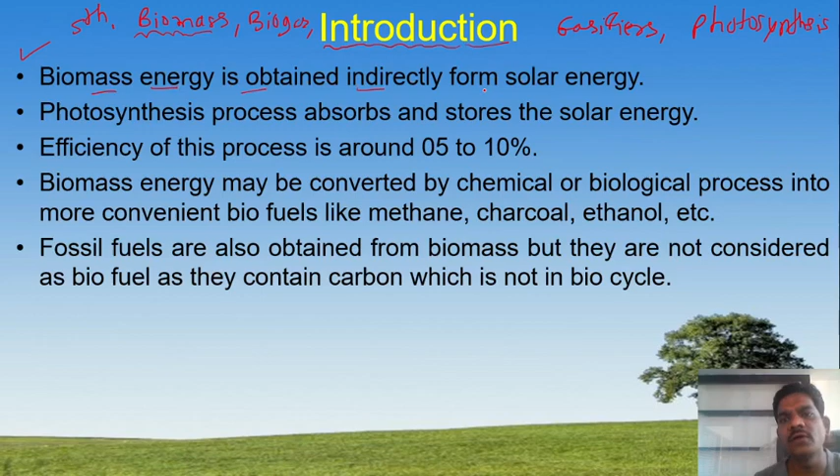You see here, guys. Biomass energy is obtained indirectly from solar energy, right? Means we know that biomass totally depends upon solar energy. We know that this biomass is totally dependent upon the sun energy, solar energy. Yes or no? Yes. Photosynthesis process absorbs and stores the solar energy. We know the efficiency of this process is around 0.5 to 10%.

Biomass energy may be converted by chemical or biological process into more convenient biofuels like methane, charcoal, ethanol, etc. So from the biomass we can obtain methane, charcoal or ethanol, such various types of fuels we can get from the biomass. By which process? By chemical or biological process, guys.

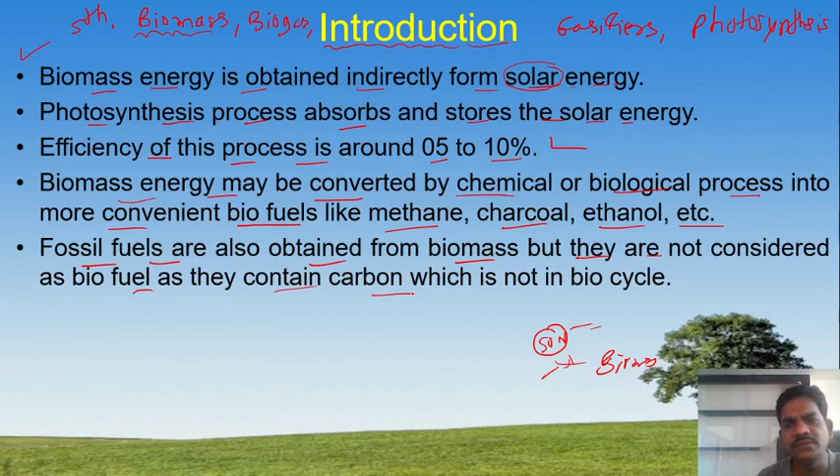Then another point: fossil fuels are also obtained from biomass, but they are not considered as biofuel as they contain carbon which is not in biocycles.

So what are the advantages related to biomass, if you consider? It is a renewable source of energy, meaning it can be used again and again, that is called a renewable energy source. The energy storage is an inbuilt feature of it. We can store energy inside the biomass, a lot of energy is stored there, right? It is an indigenous source requiring little or no foreign exchange. There is no exchange required.

The forestry and agriculture industries that supply the feedstock also provide substantial economic development opportunity in rural areas. You see, in rural areas we can develop this biomass in more quantity, so rural areas develop, agriculture industries also develop.

The pollutant emission from the combustion of biomass is usually lower than that from fossil fuels. Means the pollution emitted by diesel and petrol is more as compared to the pollution emitted by biomass.

Commercial use of biomass may avoid or reduce the problem of waste disposal in other industries, particularly municipal solid waste in urban centers.

Another use: biogas plants, apart from supplying clean gas, also lead to improved sanitation and better hygienic conditions in rural areas, as the harmful decaying biomass gas is stabilized.

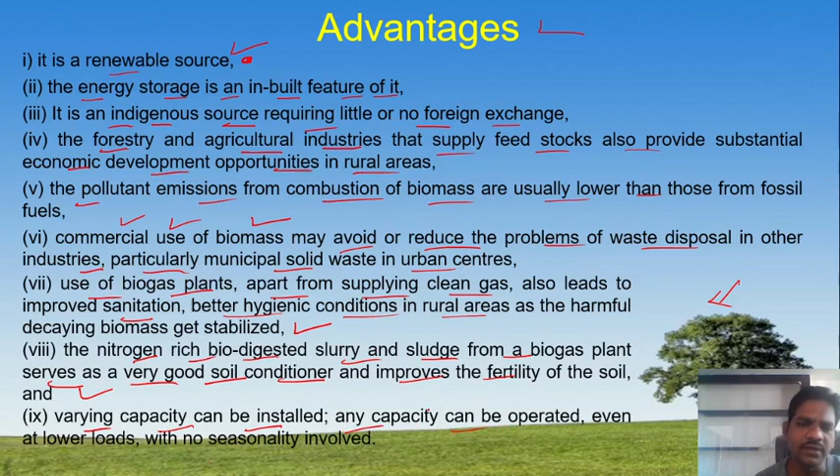Varying capacity can be installed and can be operated even at lower loads with no seasonality involved. And these are the very easy and simple advantages of biomass, guys.

So another point: what are the disadvantages of biomass? It is a dispersed and land-intensive source. So it is in dispersed form, and depends upon land-intensive source, how much land is available.

It often has a low energy density. The density of energy, meaning we know density is mass upon volume. So the density of biomass is very low as compared to petrol and diesel, guys. Yes or no? Yes.

Then the third disadvantage: it is also labor intensive, and the cost of collecting large quantities for commercial application is significant, right? Most cost is required to give the labors.

Most current commercial applications of biomass energy use material that has been collected for other reasons, such as timber and food processing residues and urban waste. These are some uses to collect biomass.

Capacity is determined by availability of biomass and is not suitable for varying loads. Okay, and it is not feasible to set up at all locations. It is not possible to set up at all locations where we can transport the biomass easily.

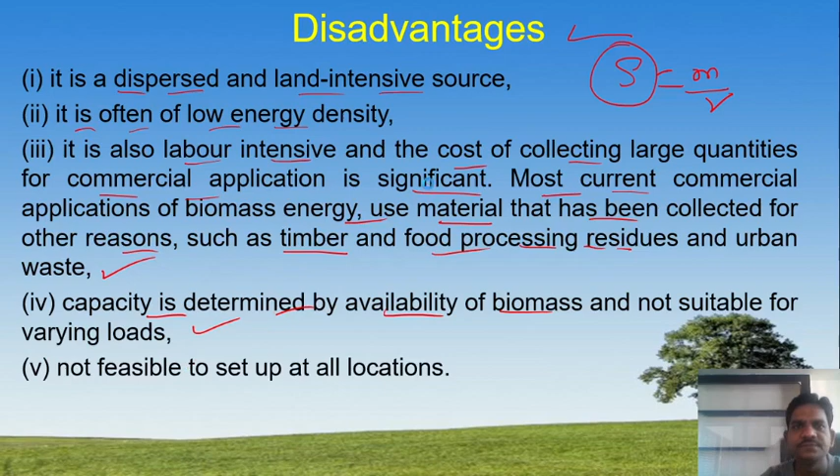So how can you produce the biomass? Energy plantations. Technically speaking, energy plantation means growing select species of trees and shrubs which are harvestable in a comparably shorter time and are specifically meant for fuel. Such plantations can be easily harvested, and the product develops within a shorter period of time. So we develop such tree species to produce biomass.

The fuel wood may be used either directly in wood burning stoves and boilers, or processed into methanol, ethanol, or producer gas. The energy plantation provides an almost inexhaustible renewable source, with total time constant of 3 to 8 years for each cycle. What are the features of energy plantations?

The heat content of the wood is similar to that of Indian coals. This is one feature. Wood is low in sulfur and is not likely to pollute the atmosphere. There is very less pollution produced by the biomass.

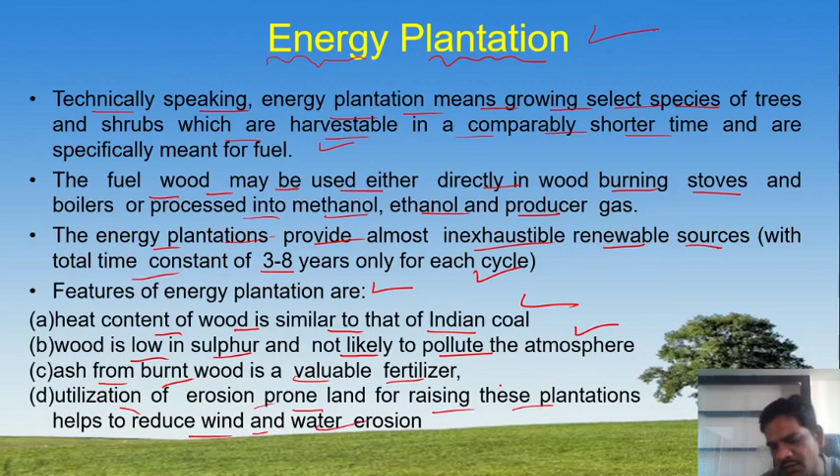Ash from the burnt wood is a valuable fertilizer. After combustion of the biomass, the ash produced is used in farms to improve soil fertility. Utilization of erosion-prone land for raising these plantations helps reduce wind and water erosion. These are some aspects of the energy plantation process.

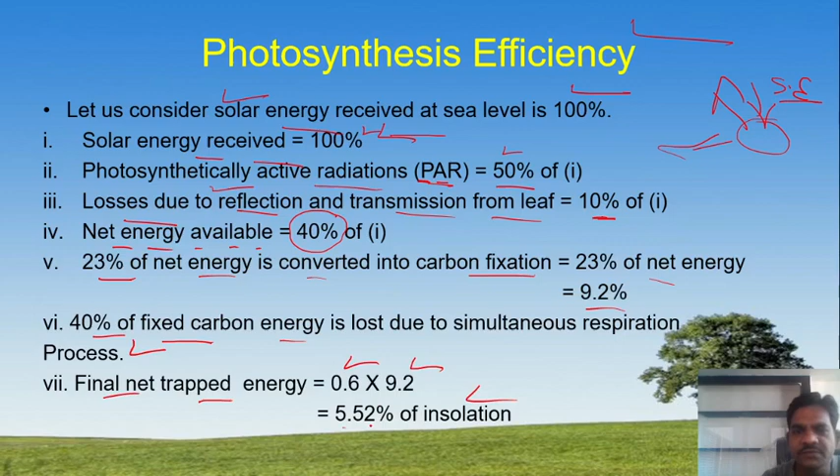Out of 100% solar energy, we have 50%, and of that 50%, 10% is lost, so net is 40% useful. Then 23% of net energy is converted into the carbon fixation process, which amounts to 9.2% energy we can use. 40% of the fixed carbon energy is lost due to simultaneous respiration. So the final net trapped energy is 0.6 into 9.2, which equals 5.52% of insolation — meaning 5.52% of radiation can be used in the photosynthesis process.

Now, another topic is biogas generation — how to use biomass for biogas generation. Biogas means methane gas produced through the process of biogas generation. Biogas contains 55 to 60% methane and 30 to 40% CO2.

When organic matter undergoes fermentation, all the biomass through anaerobic digestion generates gas. This is known as biogas. Anaerobic digestion means in the absence of oxygen - there is no use of oxygen. So when organic matter undergoes fermentation through anaerobic digestion, gas is generated, and this gas is biogas.

This anaerobic digestion consists of three phases: enzymatic hydrolysis, acid formation, and methane formation. In enzymatic hydrolysis, fats, starches, and proteins are broken down into simple compounds. It takes about 1 day at 25 degrees Celsius. This is the process of enzymatic hydrolysis.

Second is acid formation. Facultative and anaerobic organisms, collectively called acid formers, break simple compounds into acids. This also takes about 1 day at 25 degrees Celsius. Much of the CO2 is released in this stage.

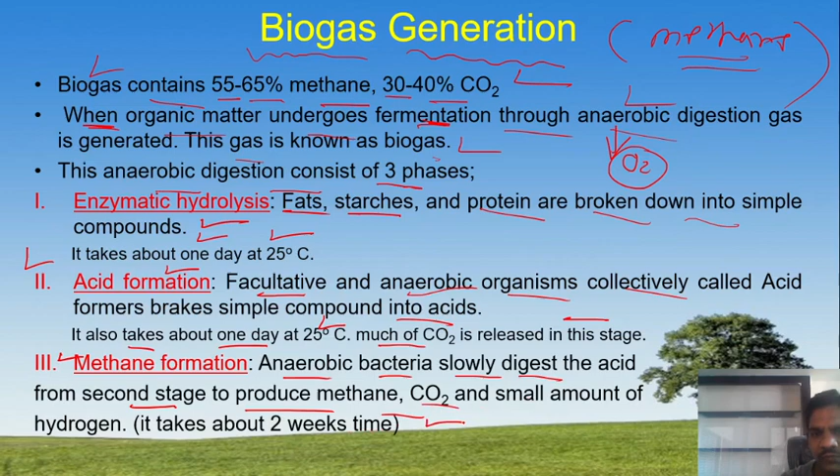Third is methane formation. Anaerobic bacteria slowly digest the acid from the second stage to produce methane, CO2, and a small amount of hydrogen. This takes about 2 weeks. This is the process of biogas generation as methane gas, and this is very important - this question is always asked in exams.

What are the operational parameters for a biogas plant's formation? First we require temperature. Temperature plays a very predominant role in producing biogas. Methane-forming bacteria work best in the range of 20 to 55 degrees Celsius temperature in a digester tank - whatever tank we have, we must maintain this temperature range. The rate of digestion increases with temperature. Gas yield rate doubles at about every 5 degree Celsius increase in temperature. But with increasing temperature, methane content reduces.

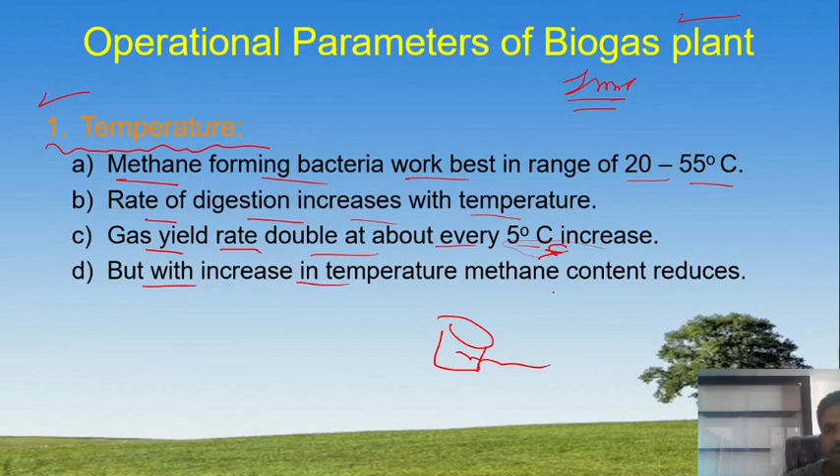Pressure - how much pressure is required for biogas formation? This is a very important parameter. Minimum pressure required is 1.2 bar, considered an identical, ideal situation. Any leakage of oxygen in negative pressure completely inhibits the growth of anaerobic bacteria.

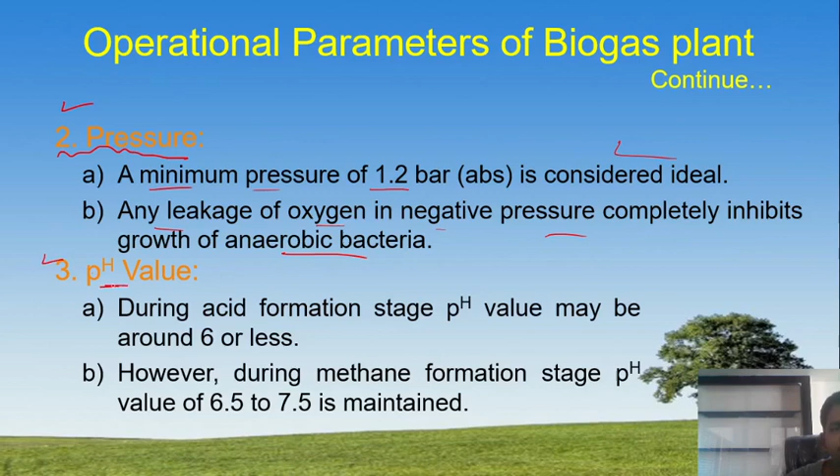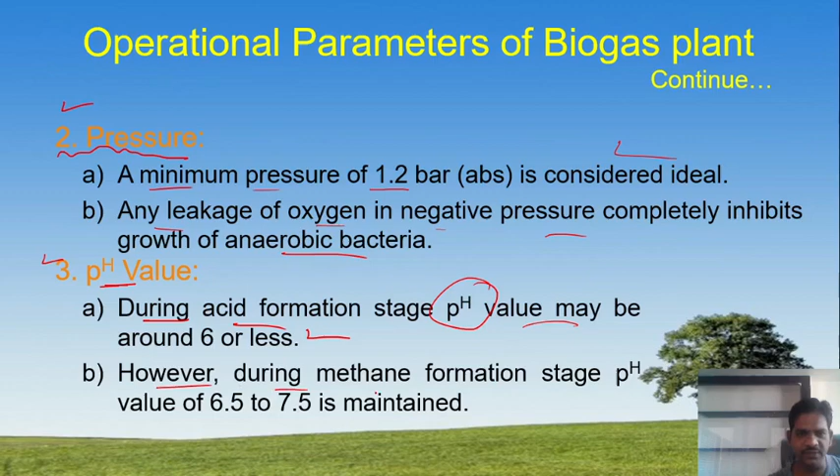Another requirement is pH. How much pH is required during the acid formation stage? pH value may be around 6 or less - this produces a larger amount of anaerobic bacteria and a larger amount of methane gas. However, during the methane formation stage, pH value of 6.5 to 7.5 is maintained.

Then the solid to moisture ratio - how much is required? If water content is too high, the temperature of the slurry decreases the gas formation rate. This is very important. If water content is too low, acid accumulates and hinders fermentation. The optimum total solid concentration ratio is 7 to 9%.

Feeding rate - how much biomass is fed into the digester tank? If feeding rate is too high, acid may accumulate and the digestion process may stop. Also, at a higher feeding rate, the retention period will be very less.

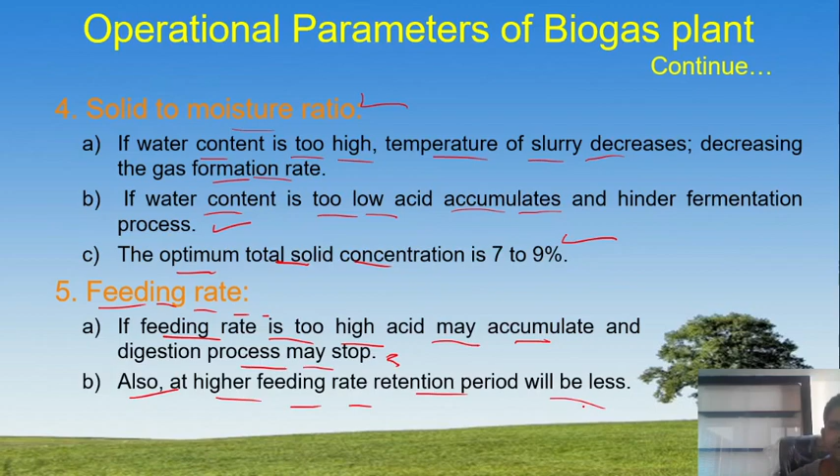Another important parameter is carbon to nitrogen ratio. This is a very important ratio for producing biogas in the digester tank. Carbon and nitrogen are the main nutrients for anaerobic bacteria - carbon supplies energy, and nitrogen is needed for building up cell structure. The optimum carbon to nitrogen ratio is 30:1, meaning carbon required is 30 and nitrogen required is very less, as bacteria consume carbon 25 to 30 times faster than nitrogen.

Then seeding of bacteria - to start and accelerate the fermentation process, a small amount of digested slurry containing methane-forming bacteria is added. This is known as seeding - we add methane bacteria to the digester tank to improve the methane gas fermentation process. If the biomass is animal manure, it already contains acid and methane formers, hence seeding is not required. But if biomass is from other sources like jungle waste, then seeding process is required.

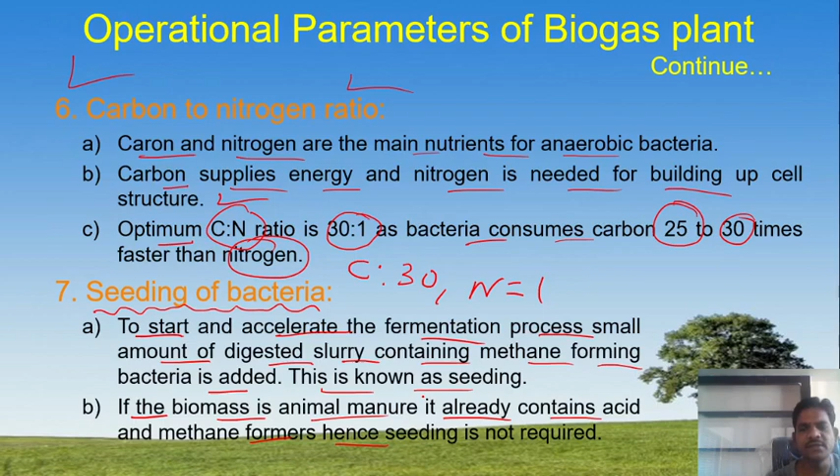Mixing or stirring maintains uniform concentration and temperature. Mixing minimizes the formation of scum at the surface, and frequent stirring prevents the deposition of solids at the bottom. So we require frequent mixing and continuous stirring inside the digester tank.

Retention time is determined by the volume of the digester divided by the volume of slurry added per day. It is optimized to achieve 70 to 80% complete digestion. For cow dung, retention time is around 50 days.

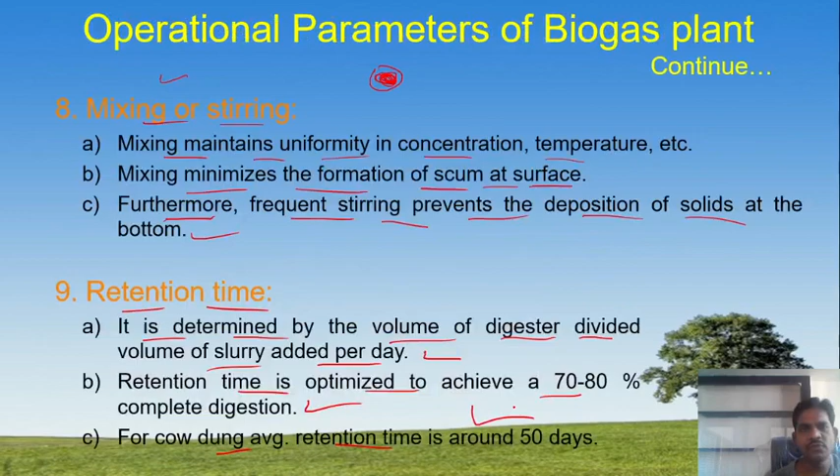What are the classifications of biogas plants? Biogas plants are classified into two types: as per process and as per construction. As per process: continuous type and batch type. As per construction: dome type and drum type. In continuous type, there is single stage and double stage. In dome type, there is floating drum and fixed drum. This is the simple classification of biogas plants.

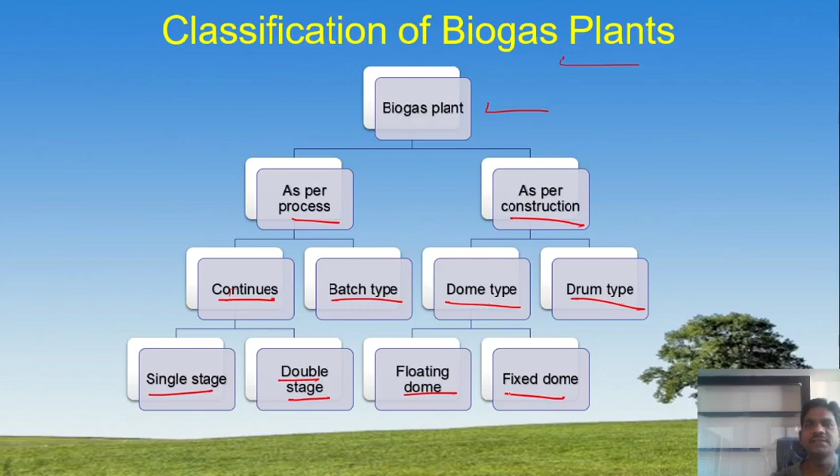In our syllabus, this biogas plant is available. So what is a floating dome plant? This is the KVIC, Khadi Village biogas model. Let's see the working of the floating type biogas plant. It is called floating because the drum floats inside the wall of the biogas plant, hence the name floating dome. Now what is the construction?

This is the mixing tank. Inside the mixing tank, we add the slurry of cattle dung and water. This is our inlet for the digester tank, and this is the inlet pipe. This is our ground level. At the ground level we construct this inlet tank, and below the ground level we construct the digester tank. This inlet pipe from the mixing tank enters here.

The dung and water mixture goes inside this digester tank. This underground digester tank is made of brick masonry. Through the inlet pipe, the slurry of cattle dung is entered inside the digester tank. These bricks provide support for the inlet and outlet pipes. Inside the digester tank, the dung and water mixture is completely mixed here.

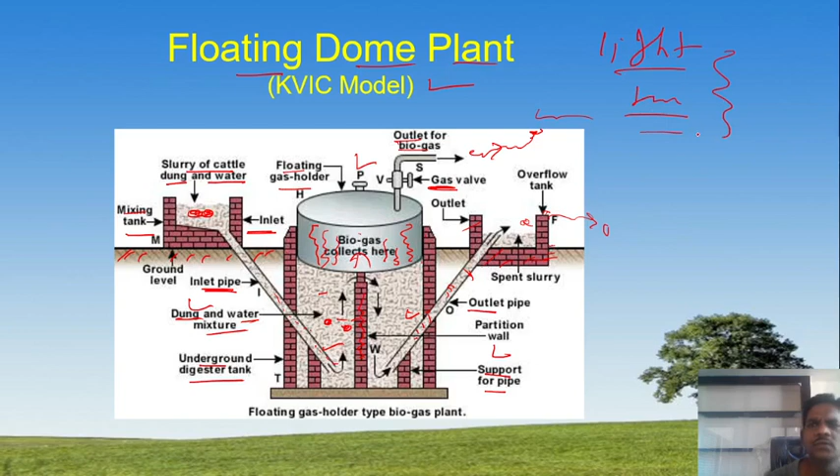Whenever the mixture is put inside, fermentation takes place and gas is generated. This gas is collected inside the dome, and the dome floats from one position to another because of the pressure of the gas. Whenever we open the outlet of the biogas, we can utilize this gas for various applications such as lighting, heating, cooling, or cooking.

After this fermentation process, the slurry comes out from the outlet pipe and transfers into this outlet or overflow tank. This slurry can be used on farms to improve the fertility of the soil and increase agricultural production. So this is the working of the floating dome plant.

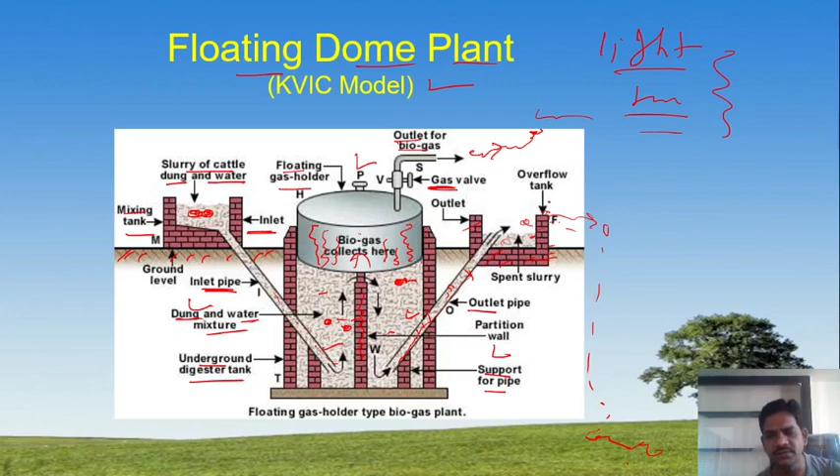Now another type is the fixed dome plant. Fixed dome means the dome of the biogas plant is not movable, it is fixed. That's why it is called the fixed dome plant.

This is the mixing tank. Inside it, we add cow dung, biomass, and water. After properly mixing, this is transferred to the inlet chamber through the inlet pipe inside the digester tank. There is no partition wall here. After the fermentation process, the biogas is produced and directly transferred through this valve.

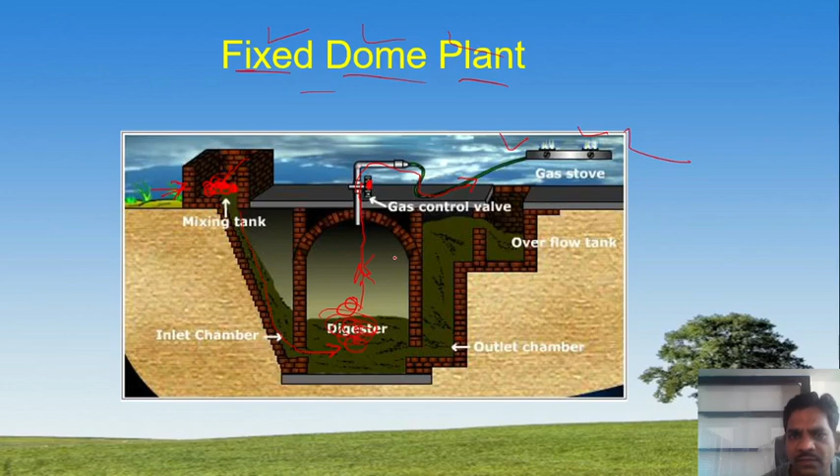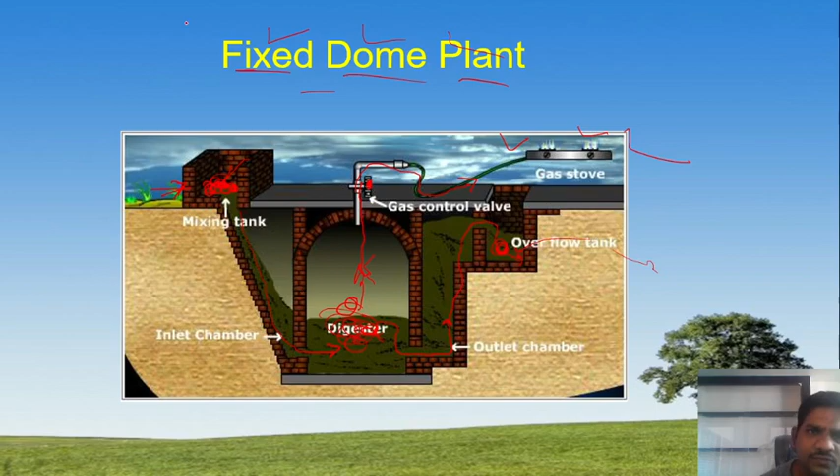Okay, just open the gas control valve, and this biogas, methane gas, we can use for cooking purposes. Fixed dome means there is no movable part. After the fermentation process, the slurry is released through this outlet and stored inside this overflow tank. From this overflow tank, this slurry can be used in farms to improve the fertility of the soil. So this is the construction of the fixed dome plant, guys.

Okay, so when we discuss the fixed dome and floating dome, there is some difference asked in exams. You should know this difference, how to differentiate all these parameters. So if you differentiate the fixed dome and floating drum, in fixed dome the masonry of the concrete structure is entirely fixed.

In floating drum, the masonry is a digester with a steel, plastic, or composite base gas holder being used. The fixed dome is low cost. The floating drum is very high cost, 20 to 30% higher. The fixed dome is low maintenance, while the floating drum requires frequent maintenance. The fixed dome has very low reliability, while the floating drum has high reliability.

Higher masonry and supervision skill is required in fixed dome. In floating drum, low masonry and fabricating skill is required. In fixed dome there is variable gas pressure, which complicates appliance design. In floating drum there is constant gas pressure, which is a simple design to apply and use. So these are some differences between fixed dome and floating drum biogas plants.

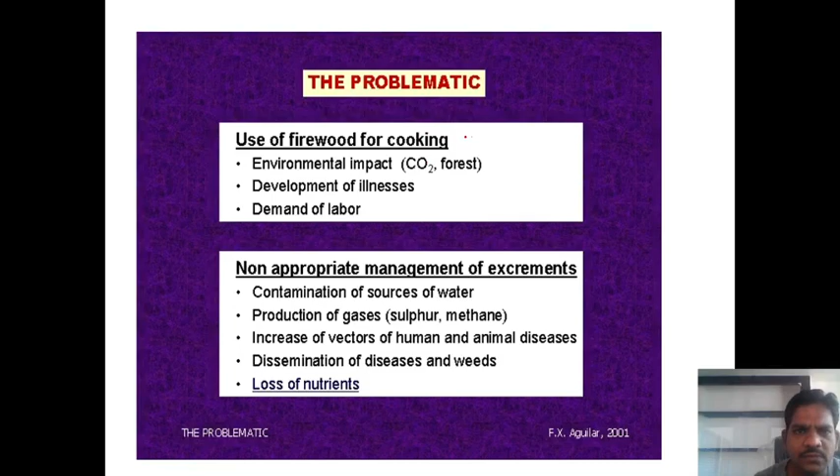So then, use of firewood for cooking. If you consider the production, biogas digestion production, we already discussed these conditions, but in short we will review. We require daily fresh feedstock, meaning we require daily cow dung like that.

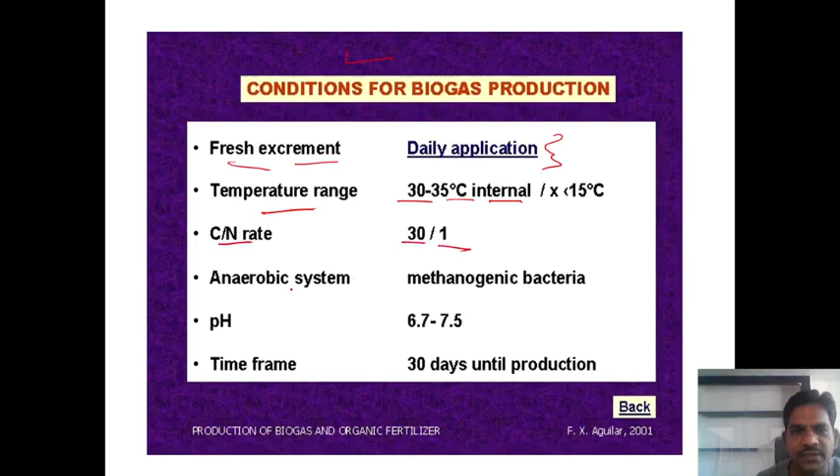The temperature range required is 30 to 35 degrees Celsius. The carbon nitrogen ratio is 30:1. The anaerobic system used is methanogenic bacteria. The pH required is 6.7 to 7.5. The time frame required for full production of biogas is 30 days.

Okay guys, then what is the application of this biogas? Lighting, energy, cooking, and heating application. These are the applications of biogas.

Then, the chemical composition of the biogas: methane CH4 is 40 to 70%. Carbon dioxide CO2 is 30 to 60%. Hydrogen is around 1%. Nitrogen is 0.5%. Carbon monoxide is 0.1%. Oxygen is 0.1% and hydrogen sulfide is 0.1%. This is the chemical composition of biogas.

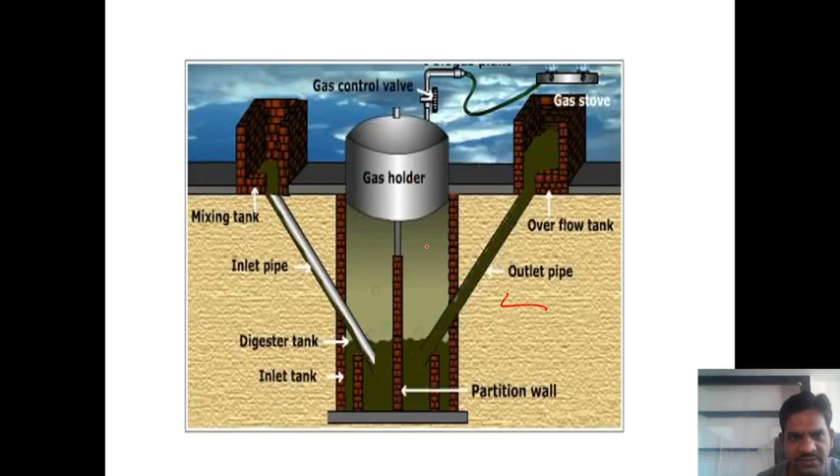So we already discussed this in our previous diagram. This is the floating drum - once again I will revise it, the drum floats inside here, yes or no? This is the fixed dome - this diagram we already discussed. Once again I will repeat this here, look at this diagram.

Slurry of cattle dung is entered inside this mixing tank, guys. This is our ground level. This is the slab cover. This is our digester tank. From the ground level, the slurry enters inside this digester tank. Dung and water are mixed here. This is our inlet chamber, guys. The underground digester tank is here.

Then after this, the slurry undergoes fermentation here, and biogas will be produced. This is the dome, and the dome is fixed - that's why it is called the fixed dome type plant. This gas will be generated, and this gas valve is opened so we can use it for various application purposes.

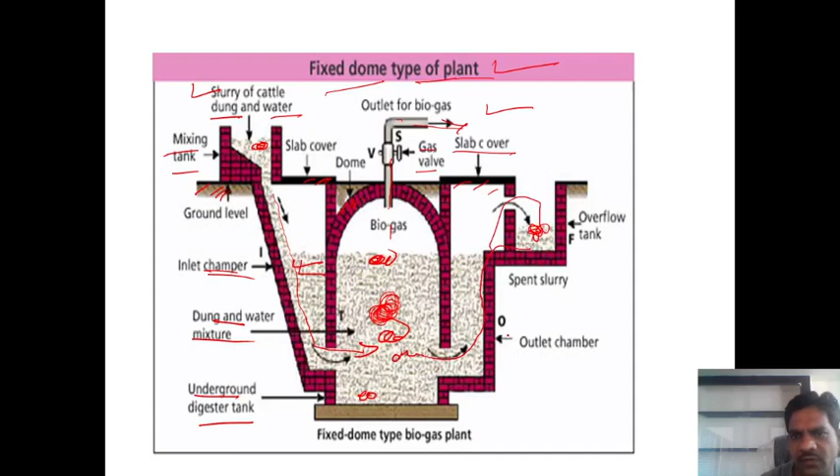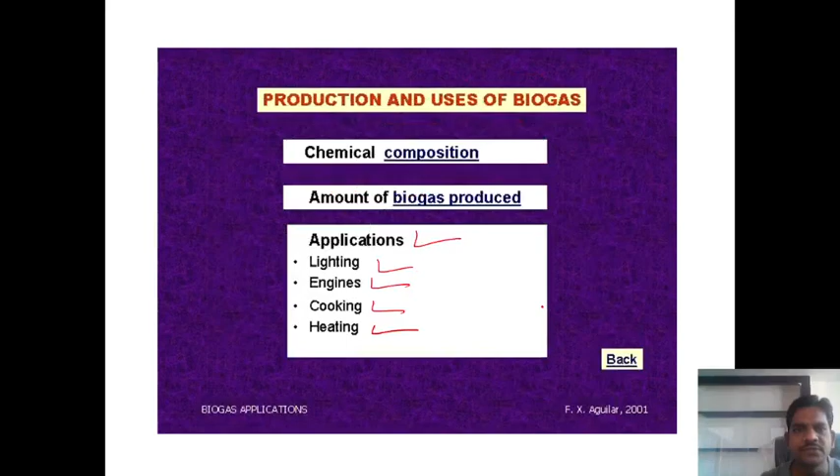Then after that, this slurry comes out through the outlet and flows inside this overflow tank outlet chamber, and this slurry can be used for various purposes in farming or like that. This is the diagram we already discussed, and this is the floating drum. Okay guys, so this is the simple explanation about biogas energy.

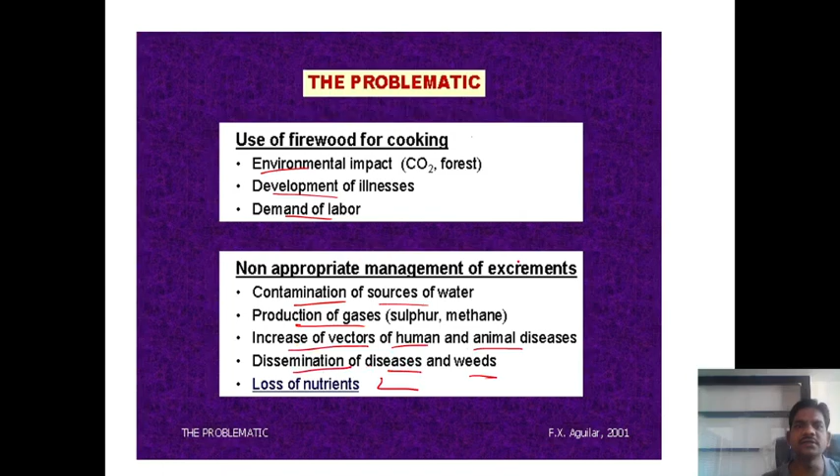Okay, so if you consider this situation, the problems related to biomass include environmental impact, development of illness, demand of labor, non-appropriate management, contamination of water sources, production of gas, increase in vectors of human and animal disease, dissemination of disease and weeds, and loss of nutrients. These are some problematic situations regarding biomass.